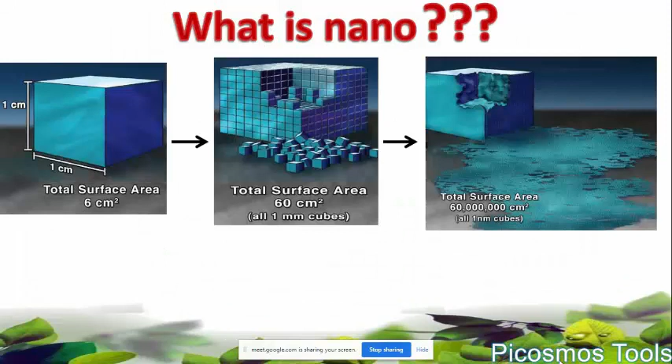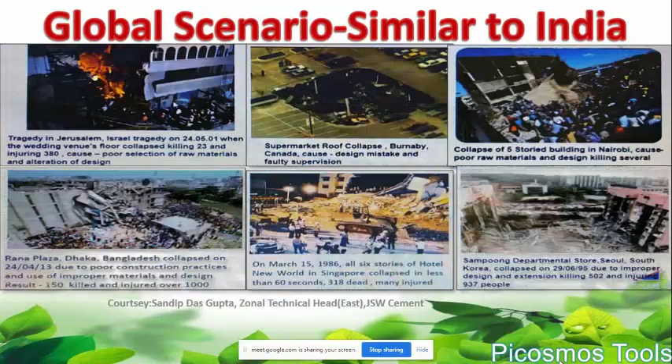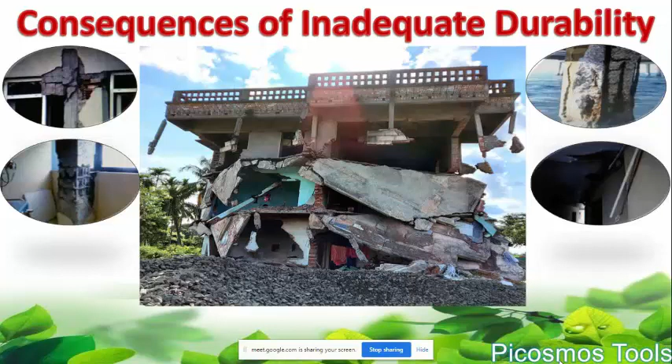It's not visible. Screen. Is it now coming? Hello, is it visible? No, not visible, sir. Yes, now it's visible, no. Sir, kindly conclude in 5 minutes.

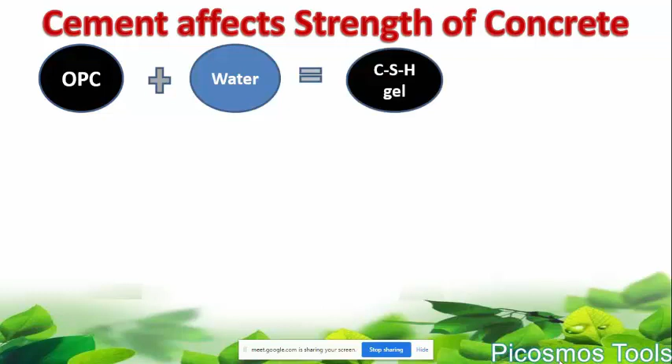Today I am talking about chemical analysis study on nano concrete, self-healing. Myself, Professor Moina Ghoshal, Joint Secretary, Coal Ash Institute of India. Agenda is: what is nano concrete and concrete durability, case studies on durability, factors affecting durability, role of nano titanium dioxide in durability, my work, and conclusion.

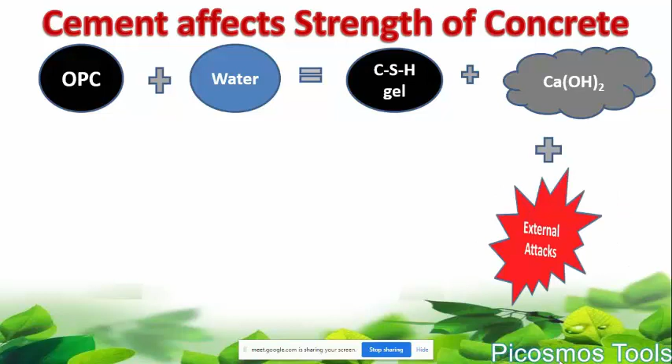What is nano? Nano, everyone knows, is 10 to the power minus 9 meter scale. It gives efficiency, increased surface area, and also gives us more durability of concrete.

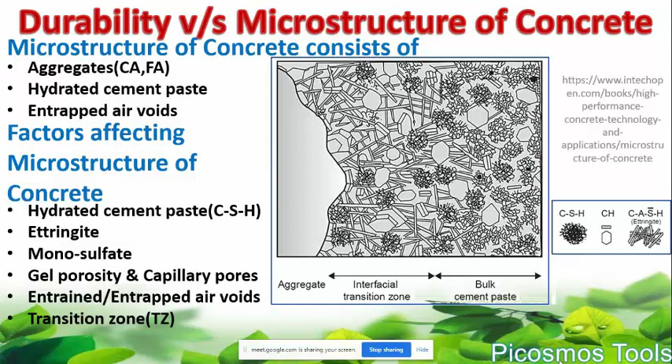We know there are some case studies for durability of concrete, failures from outside India. Consequence of inadequate durability of concrete is loss of strength. I am not going into all these details. Mainly, this is indurable concrete - when it's not durable. Concrete mainly we need for strength of buildings. If it is not durable, then what is that?

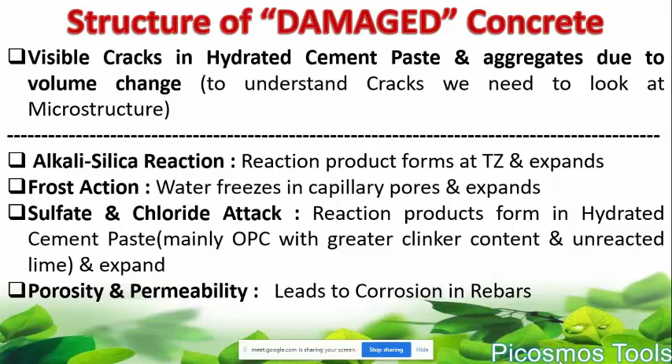Factors affecting durability of concrete: cement, concrete, water - there are many factors, I will not go into details, no time. Cement affects strength of concrete. Now OPC, we are using this cement.

Cement reacts with water to give calcium silicate hydrate gel. This is a complex compound and this is the reason for the strength of concrete and also its durability and longevity. We also get calcium hydroxide. Now calcium hydroxide is a treacherous part - it attacks from external attacks and it deteriorates the concrete.

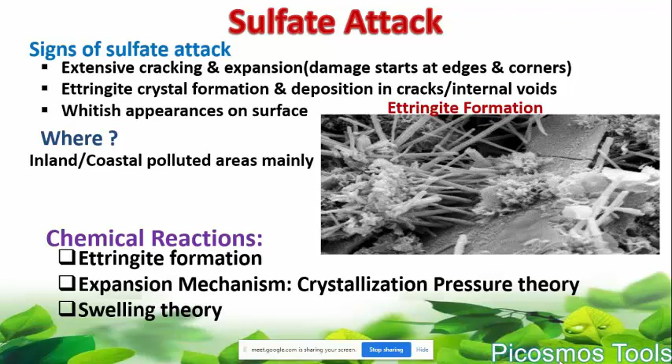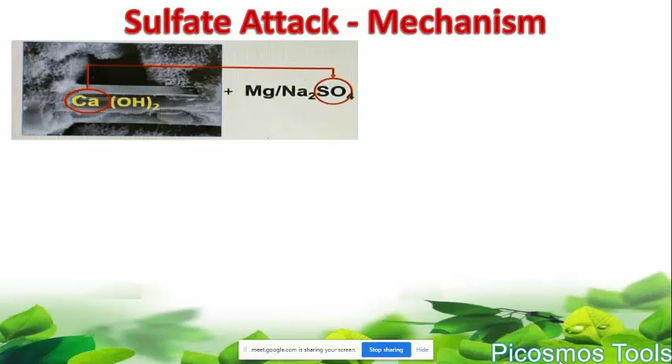We'll come to the structure of damaged concrete. These cracks of concrete due to undurable concrete are due to mainly sulfate and chloride attack from outside, frost actions, permeability of water, and alkali silica reaction from the sand and stone present in the concrete. Sulfate and chloride attack comes from the sea part, and sulfate attack from the inland part, mainly fuels give this.

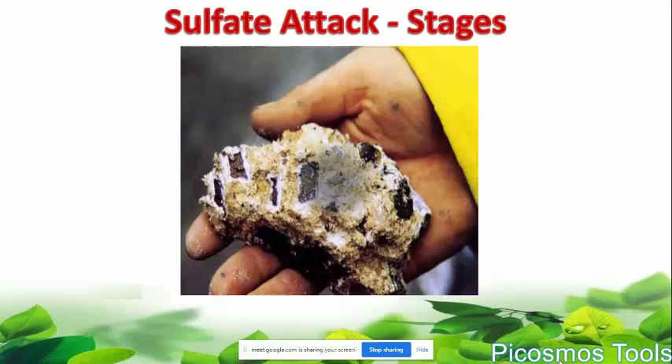Yeah, hello. Excuse me sir, yes, hi sir. Your screen, I think it's not... Yeah, it's fine now, okay.

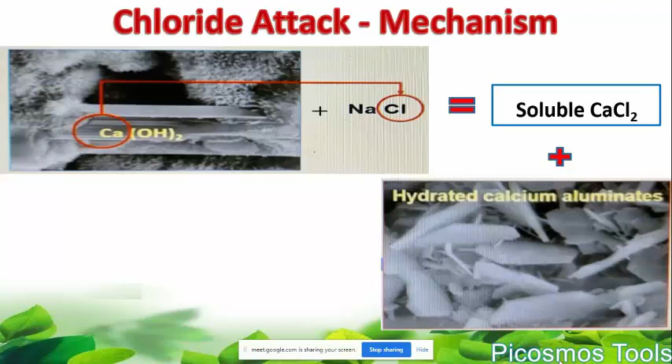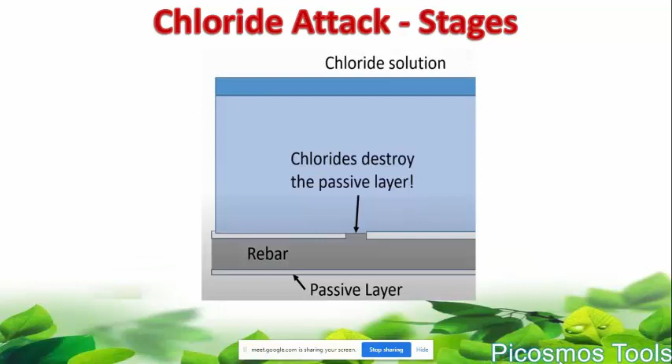Now, signs of sulfate attack: crystals get formed and develop more, and it cracks the concrete apart. The causes mechanism of sulfate attack is this: calcium hydroxide, the treacherous part I already told you, reacts with the sulfate. It produces secondary gypsum, calcium sulfate, then it produces crystal formation of calcium hydrate aluminate. It tears apart the concrete through cracks, and the concrete disintegrates.

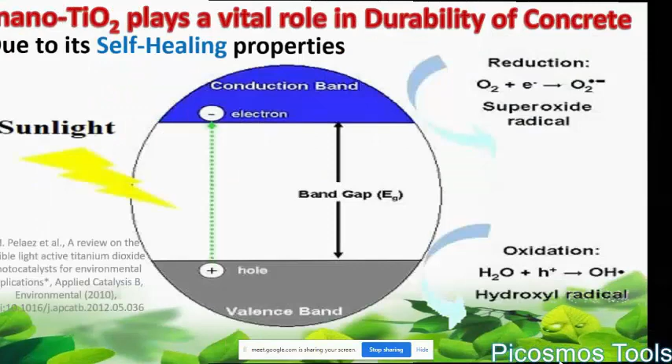In sulfate attack, the water solution penetrates the concrete, and we get this type of concrete after the attack. For chloride attack, sulfate salt is formed - this reacts with calcium hydroxide, reacts with the chloride, forming soluble calcium chloride. It further reacts with water and hydrated calcium aluminates. This tears apart - this is crystal form - from calcium chloride aluminate, the Friedel's salt, and the concrete disintegrates.

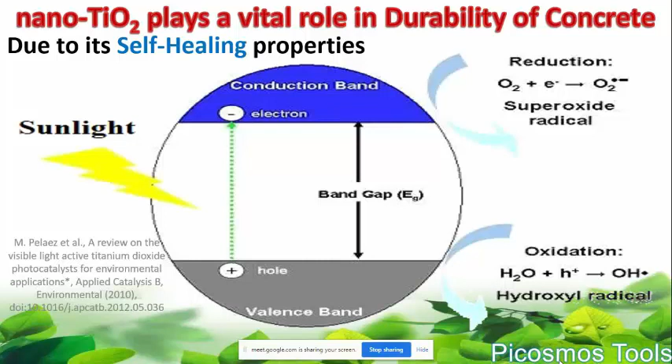In the stages of chloride attack, the chloride solution penetrates the rebars, the reinforcement deep in the concrete. It reaches the reinforcement and breaks it up. This is the case of chloride attack.

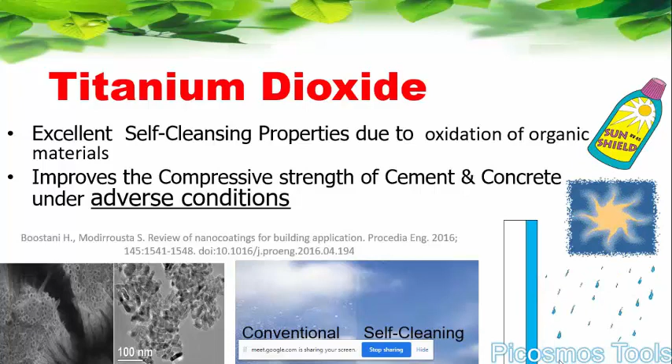Now, nanotitanium dioxide, which I have used, plays a vital role due to its self-healing property. It oxidizes the outside material by taking up electrons from atmospheric oxygen, and it oxidizes. It can also oxidize the COVID virus, bacteria, and organic molecules - this paper says that.

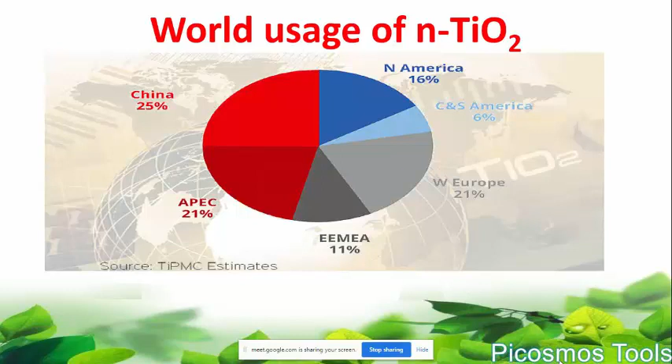Titanium dioxide is very much used in construction for its excelling self-cleaning properties, and also improves concrete strength in adverse conditions. This is a picture where dirt is there, and the glass is of nanotitanium dioxide, and it self heals - it disintegrates the dirt.

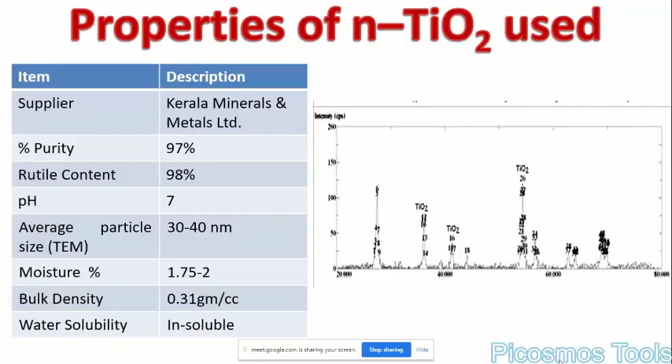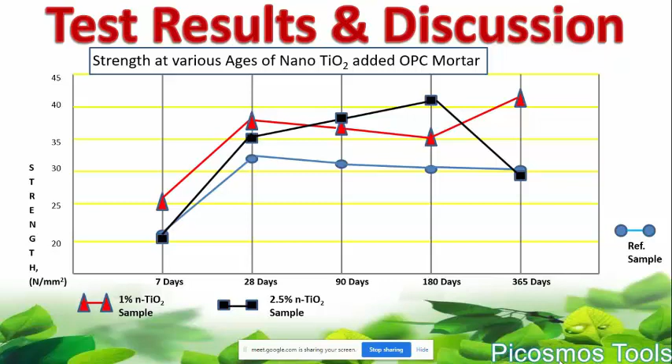Now world usage: North America and Europe are mainly the users of nanotitanium dioxide, more than 40% usage, and also some Asian countries, China and Japan, are using it. My research: cement plus nanotitanium dioxide plus water - we get very good results.

These are properties of nanotitanium dioxide used - it's a crystalline property as per the XRD images. In my research work results discussion, at 7 days I am getting this strength of the reference sample, but if I use the nanotitanium dioxide, it's increasing at 28 days, the standard, and in the long term the red line is increasing at 1 year.

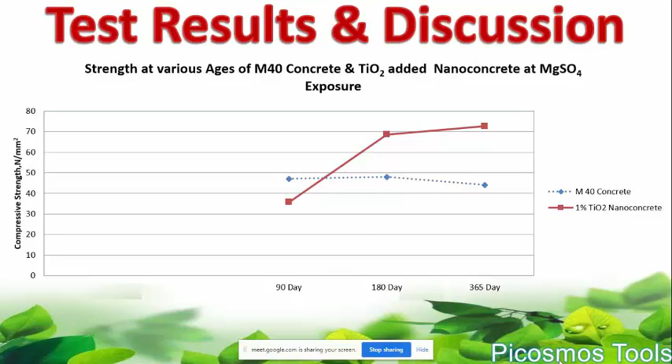Nanotitanium dioxide is used here in cement mortar. Microstructure analysis, the same analysis - see the fine uniform microstructure in the nanotitanium dioxide sample.

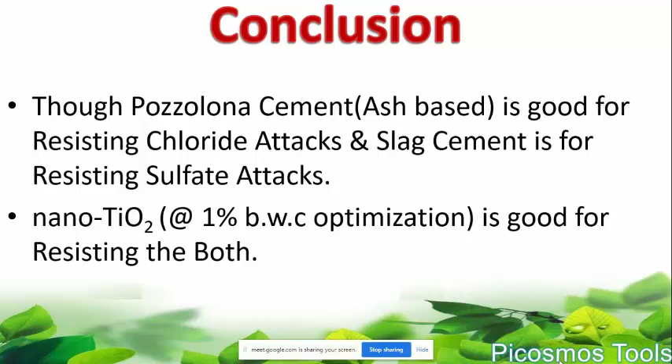In conclusion: though Pozzolana cement is good for resisting chloride attacks and slag cement is for resisting sulfate attacks - PPC cement and PSC cement - nanotitanium dioxide at the rate of 1% by weight of cement optimization is good for resisting both.

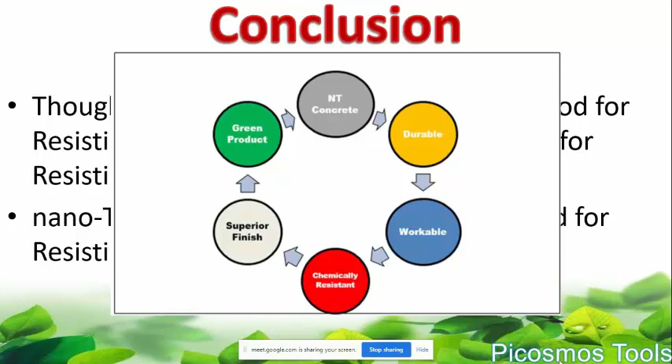Also, this nanotitanium dioxide concrete is more durable, more workable, more chemically resistant, having a superior finish because we don't have to apply white color - the concrete becomes white if we add nanotitanium dioxide. It's a green product because nanotitanium dioxide can be produced from wastage, so it's more sustainable than the plain concrete we use today. Thank you.